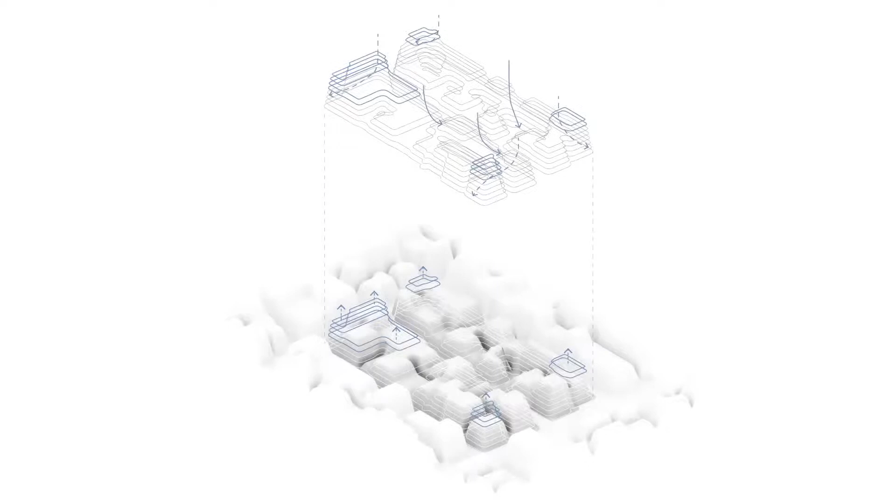Right to Water addresses the issue of water access for Palestinian refugee camps in Amman and their potential to achieve water independence through rainwater local collection and storage.

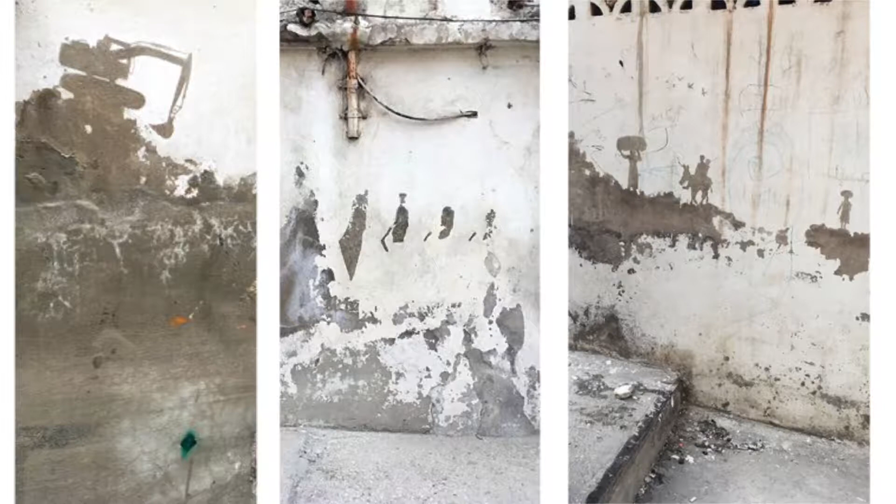For 70 years, hundreds of thousands of Palestinians who were forcibly displaced from Palestine in 1948 have been living in permanent temporariness in refugee camps in Jordan. The hope that refugees will be returning to Palestine has shaped the experience and architecture of the camps. These camps developed a unique identity around the notion of the right to return, which has often been utilized to justify the marginalization of the camp.

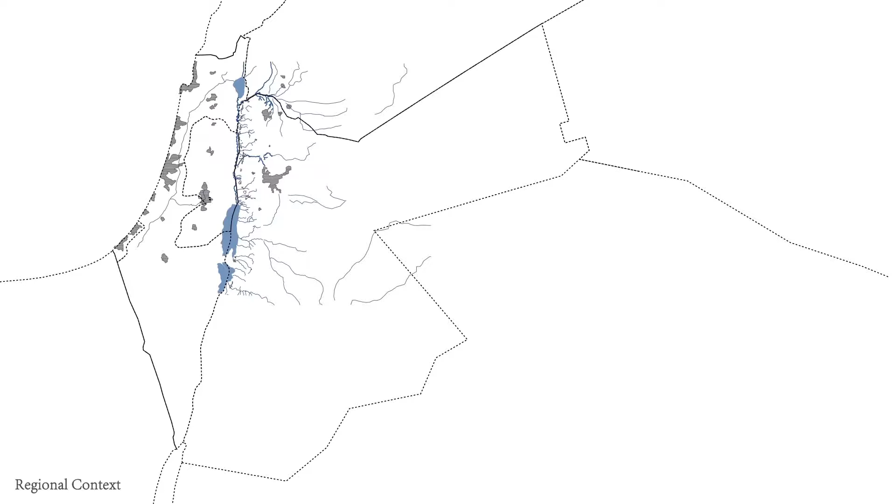and their limited access to resources like water, electricity, and proper sanitation. The status of Palestinian refugee camps puts them at a critical condition in light of Jordan's water crisis, leaving them at risk of losing adequate access to water should the government no longer subsidize water. Starting with the regional context, Jordan faces huge challenges trying to supply fresh water to its residents.

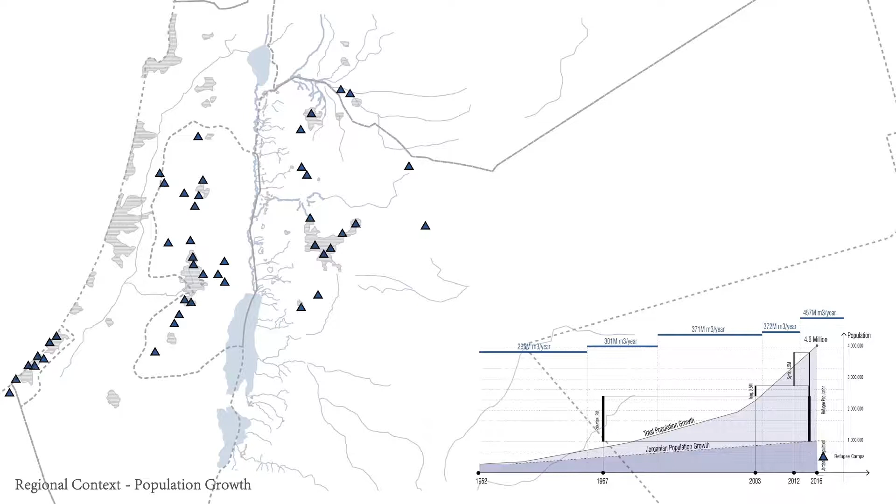Over the second half of the last century, Jordan has resorted to several national large-scale water infrastructure projects to drag water from distant areas to Amman and other major Jordanian cities. The flow of refugees from neighboring countries increased the pressure on the water supply of the country as the population grew to nearly 9.6 million residents, one-third of which are forcibly displaced populations.

However, Jordan has the capacity to benefit from rainwater collection to supply water to some of its most vulnerable settlements, like Palestinian refugee camps. Some camps could supply up to 80% of their needs with rainwater collection only.

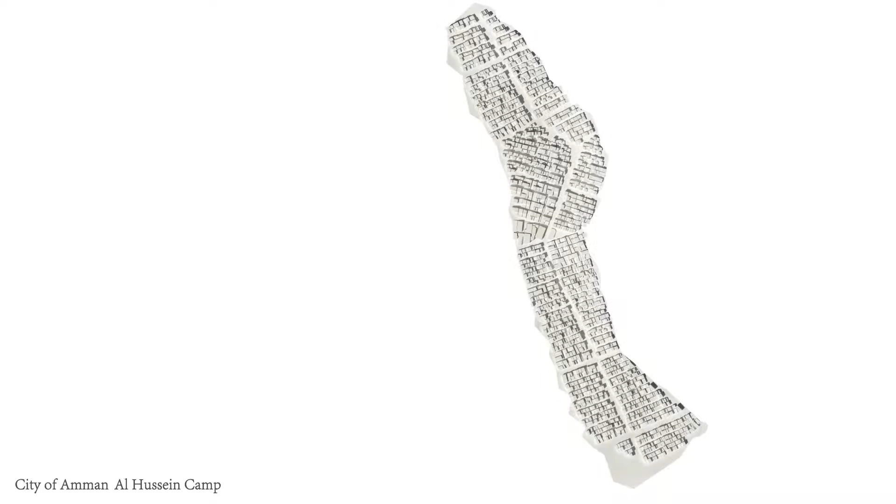The concept of microcollection is inspired by the camp's built form. Instead of having one large central pipe coming from the city water authority as the sole provider of water to the camp, the project aims to create a network of hundreds of smaller pipes, moving the water from numerous local collection points to the units of the camps directly.

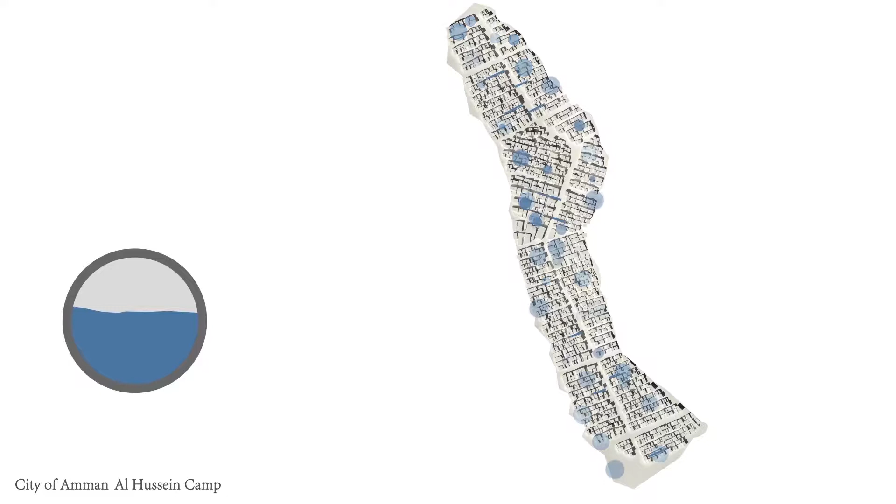Taking a closer look at Al Hussein camp's built environment, we realize the potential for such a system due to the organic growth of the camp over time, which created negative spaces between the buildings that could be used as water storage spaces. The gradual development and growth of the camp also created different levels of privacy, from Main Street to the alleys and negative spaces.

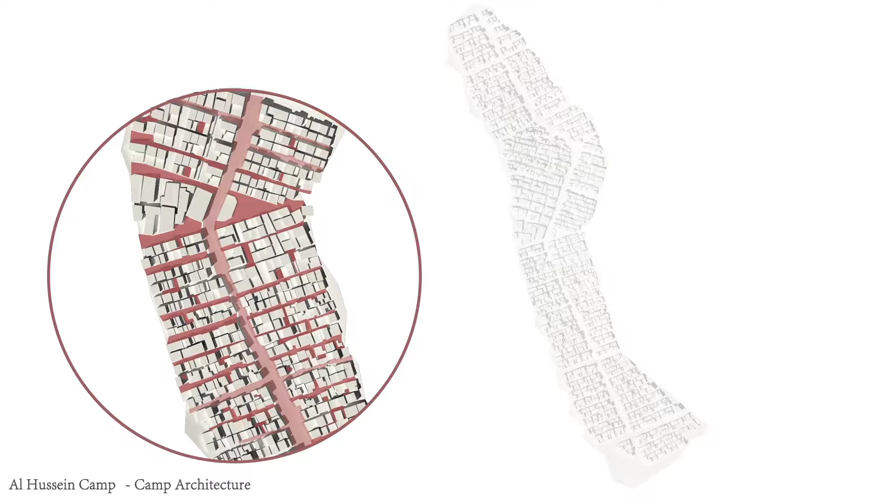The camp sits on a sloped topography, and the built form acts like a second topography that diverts rainwater into different areas based on elevation, which creates the opportunity to convert these points into water reservoirs and shared community spaces.

The project's goal is to capitalize on the uniqueness of the camp's built environment and its organic growth to implement micro rainwater capture infrastructure that allows the camp to achieve water independence.

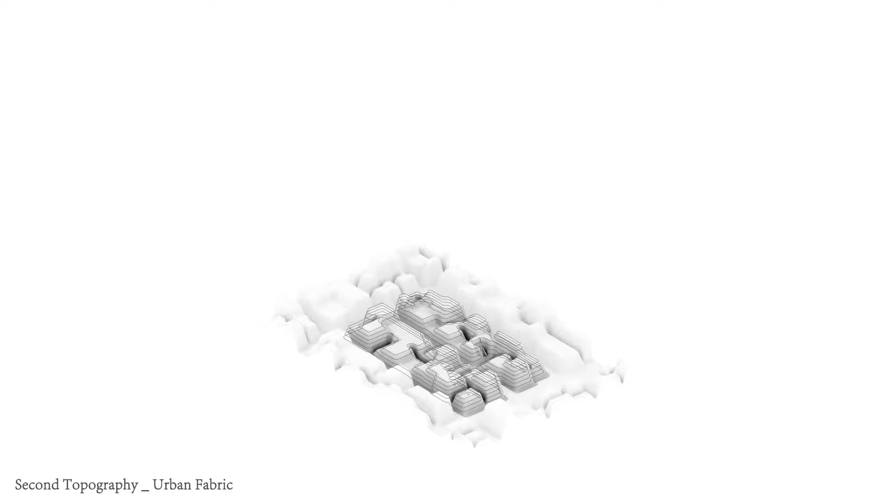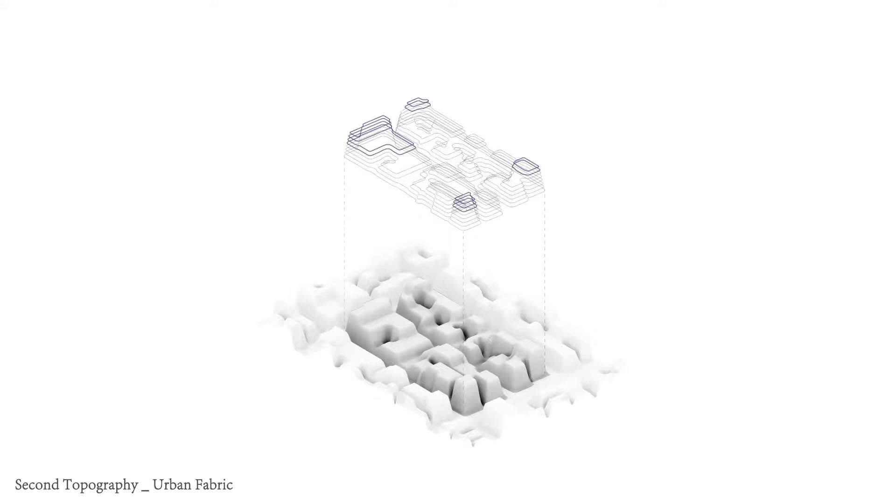The concept is based on our understanding of the urban fabric as a second topography that diverts rainwater, and that could be manipulated and molded to control the runoff and accumulation to maximize the water storage.

This chain of diversion, consolidation, filtration, accumulation, storage, and use is achieved through a series of objects that can be implemented in the existing urban fabric.

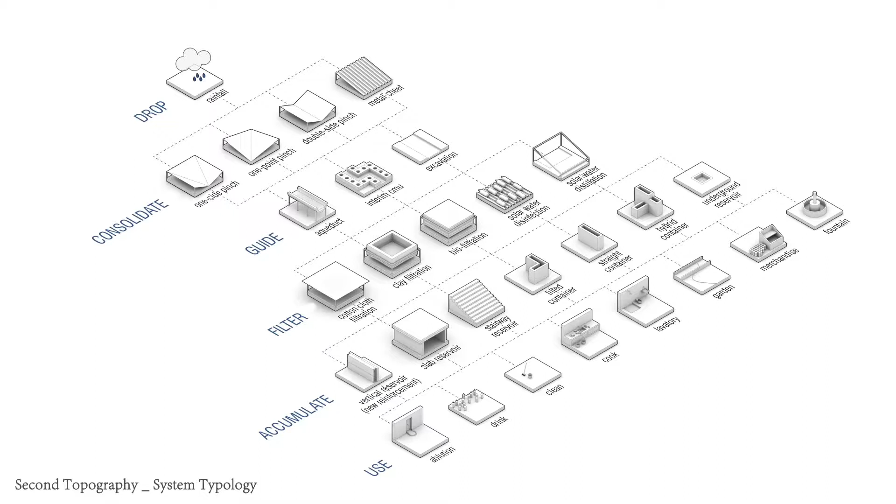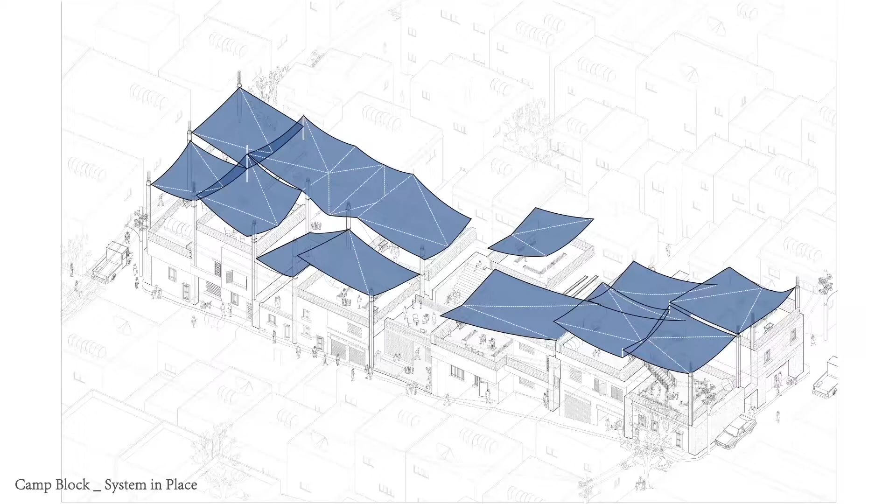Looking at the sample block in Al Hussein refugee camp, we see the diversion starting with pieces of fabric that act as deflectors, fixed at the top of buildings to direct water into local storage spaces, both fixed and foldable, which can later be linked through aqueducts that carry the overflow into larger storage volumes.

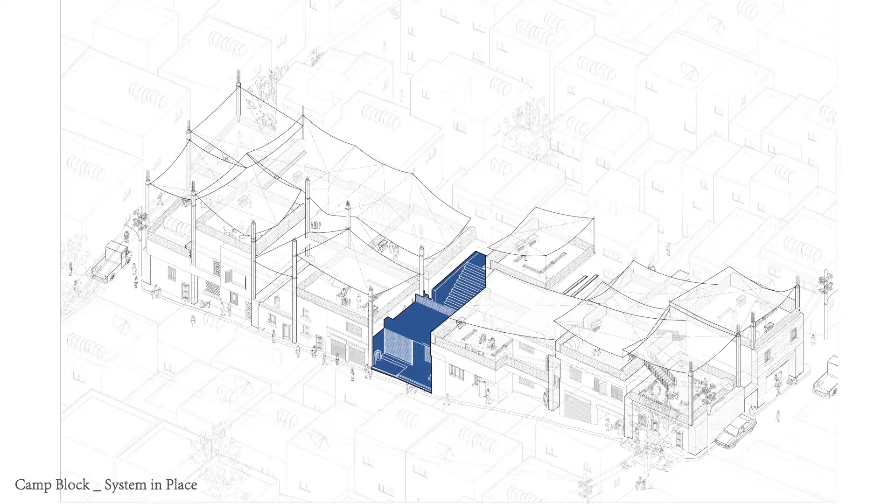These large storage masses act as bases for future vertical growth for the units themselves, and thus a hierarchy of water flow is created between the higher roofs and the lower reservoirs that correlates with the shades of privacy within the singular block itself.

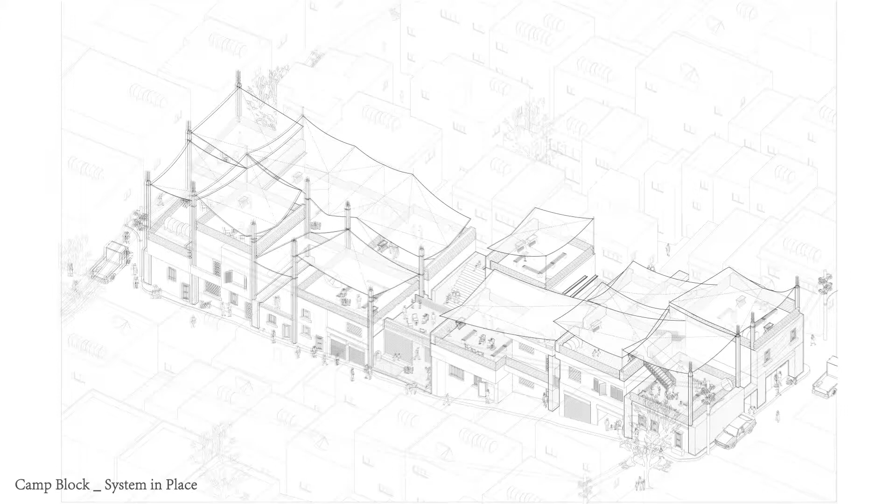The interventions are intended to be embedded in the urban fabric without the need to demolish and replace existing structures in order to add the new water infrastructure.

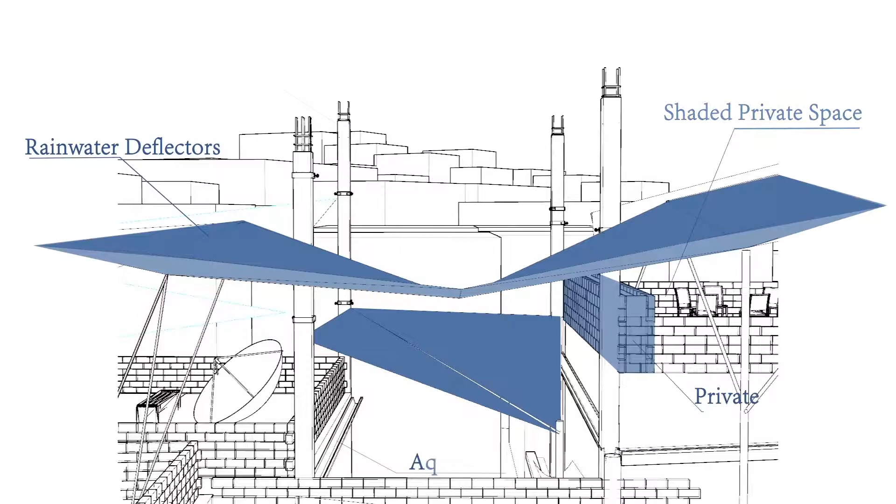The supporting columns that hold the deflectors are placed strategically to accommodate future vertical growth of the camp, as horizontal growth is restricted by the dense surrounding neighborhoods.

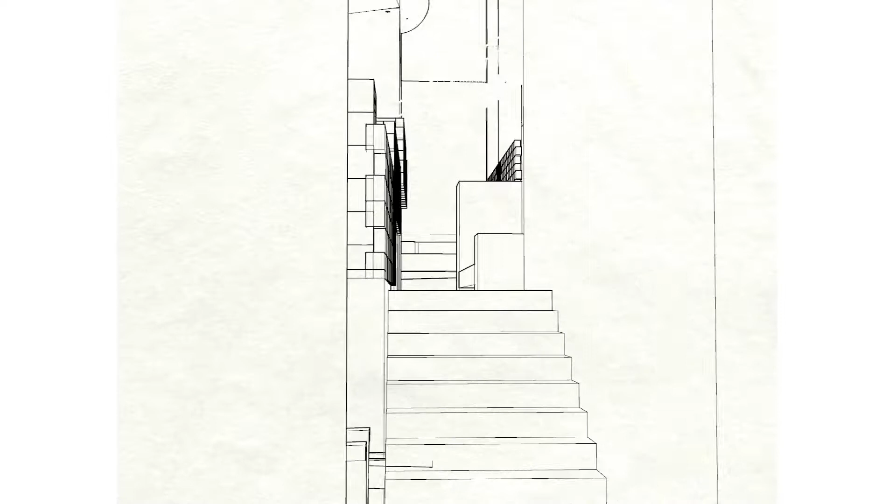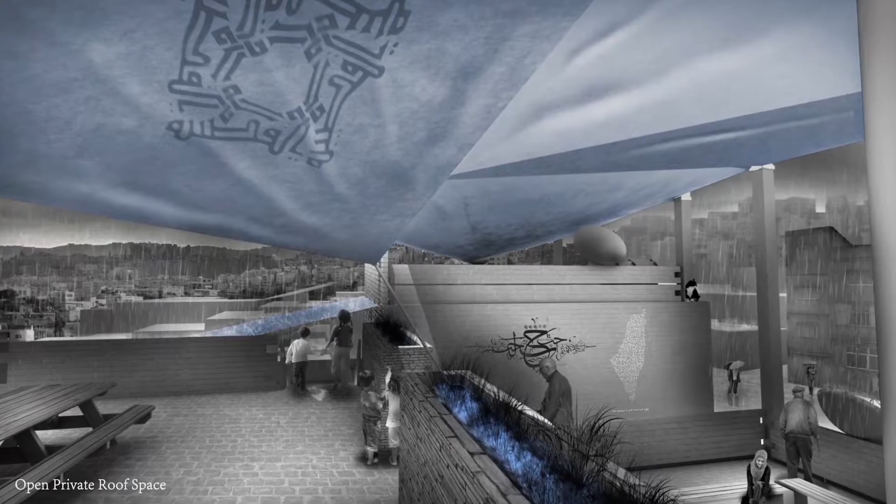While acting as elements of the proposed water system, deflectors also provide shaded spaces to activate the roofs of the block structures and create a much-needed open private space for families and communities.

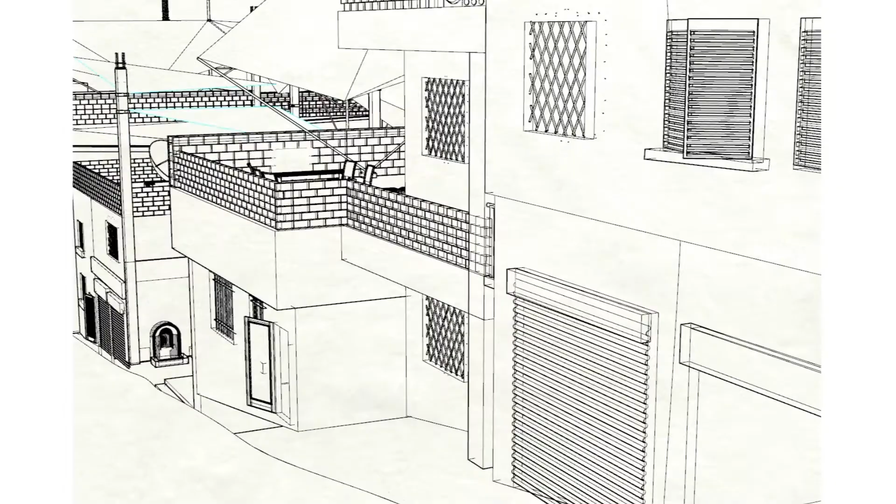By taking a section across the block through the central proposed intervention, the water reservoir can be seen underneath the open shared space, which is intended to accommodate a shared community kitchen, an open performance space, a kindergarten, and a semi-public gathering area.

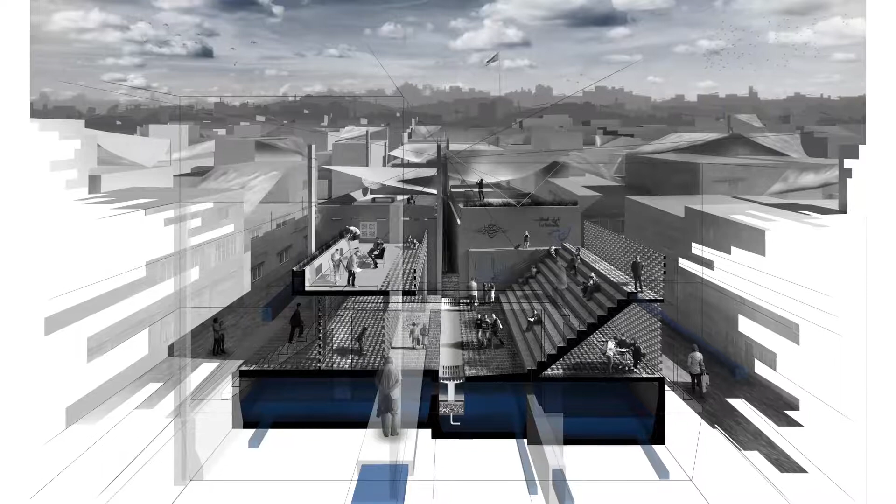Lastly, taking a section through the system, we come to understand the links between the individual elements that come together to form a larger unit that ensures equal access to all residents of the block.

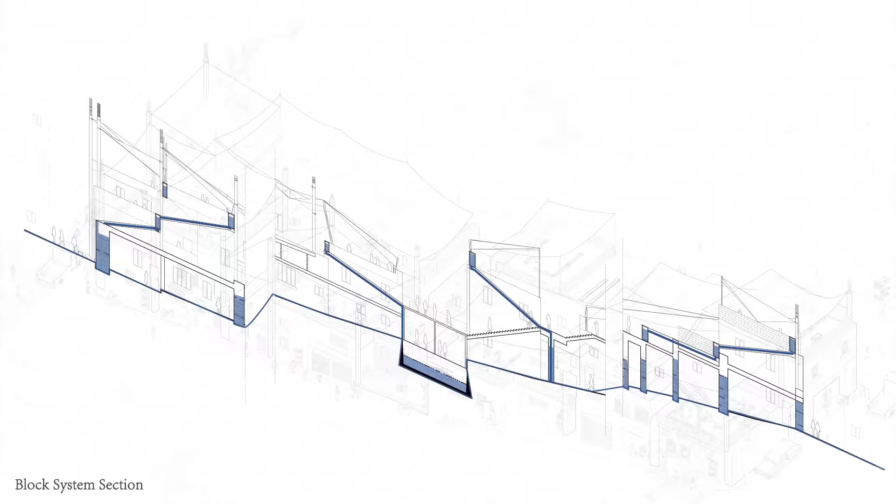The project's building phases reflect the stakeholders' involvement, starting with a singular unit and continuing to build up the collective shared parts of the system in collaboration with local NGOs, local authorities, and international aid agencies in charge of the camp systems, like the UNRWA and the Department of Palestinian Affairs.

The right to water is a concept that is intended to be replicated not only on the local scale within the camp, but also across other camps and dense working-class neighborhoods in Amman, to reduce pressure on the Jordanian water infrastructure and allow for future water independence.